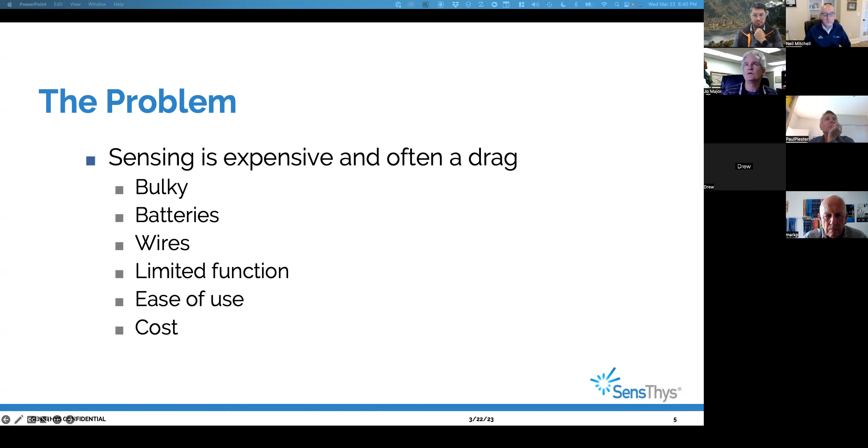We list some of the reasons there that this is hard. It's also quite expensive - quite often we're replacing sensors that cost $1,000 or $2,500, and a reader and some tags that are frankly disposable can give the same equivalent information, and it's very transformative there.

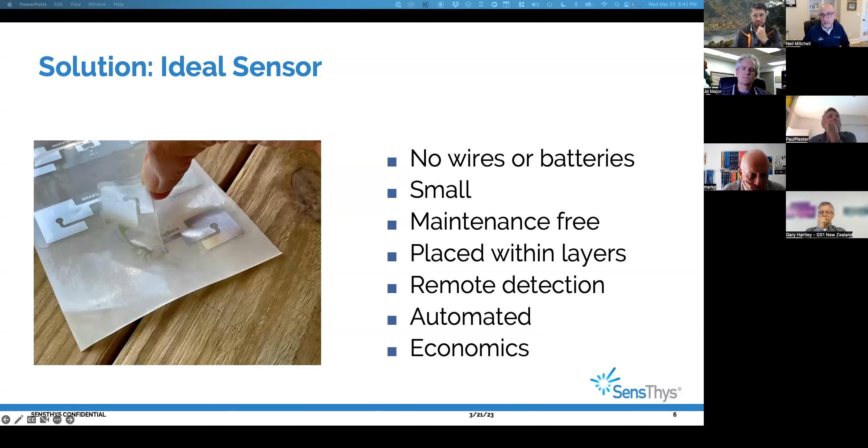So, if you kind of paint the picture of an ideal sensor, what would it look like? A bunch of us here are familiar with RFID, maybe some are not. If you say, what's an ideal sensor that will go into some of these solutions? You'd probably list things like: I don't want wires going everywhere, I don't want batteries because they run out and need to be replaced and they're bulky. I want something very small, ideally so small it's ultra thin and I can place it within layers of different materials. I don't want to have to maintain it. I want to be able to detect it remotely, wirelessly. I want it to be automated, and I want it to be really economic, relatively inexpensive. We want these sensors to be the opposite of the $1,000 statement Joe just made—I want it to be a few bucks perhaps. And that's where we are with these types of sensors. You can see an example of one in the image there.

We're going to talk about supply chain, and you may think, why in the world are they pitching us sensors—why do we have to think about the supply chain? The reason will be evident when we walk you through it: the supply chain is really good at making low-cost RFID tags, but it isn't so good if you say the medium I'm in has a high dielectric constant with a loss tangent of X, and that changes to a different dielectric constant and loss tangent during the process, and I need to operate in that environment. Those kinds of statements are outside of what the industry normally does. When we walk you through this, we'll give you a feeling for how those problems come up and how we help you solve them.

So over to you, Neil.

Let's talk through what one of these sensors looks like and what's actually constructed within them. The first thing is there's a semiconductor component—the IC or the die, many different names for it—this little chip sitting in the middle of this RFID structure. It's part of the intelligence that makes up this end solution. There's a lot of smarts in the chip, but also in how this thing is designed and put together. There are multiple antennas attached to this in reality, but as you can see, the chip is really, really small. We'll hold one up here so you can see it. Obviously you won't be able to see the chip in it because it's way too small, but this is basically one of the sensors we're talking about.

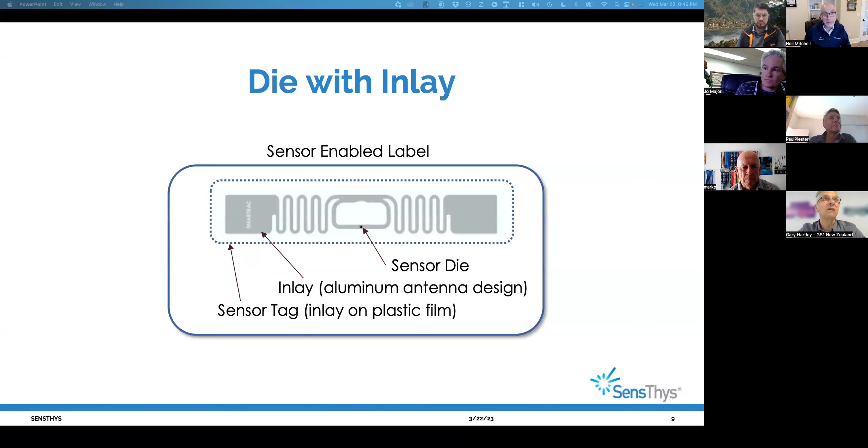Then the next step after the aluminum antenna is to put it into a label, or at least into a protective structure—something you'd actually apply into your system. Often we're talking about something where you want printing on it, or you may want a barcode on it.

You'd probably want it a few layers. Do you want it white? What kind of structure do you want it on? Rolled or sheets? Which way do you want it to unwind? There's a whole complicated array of questions that come with how these things are provided. We can certainly help you with that. It's not rocket science, but there's a hell of a lot of details, and we can help you through that.

If you apply that onto a metal, say in a vehicle, maybe now we want to get moisture wicked to it or transported to it, so this RFID sensor can do its thing. So now you're talking about attaching a wick tail in order to draw water towards it. That's something we've been involved in, defining what that wick looks like.

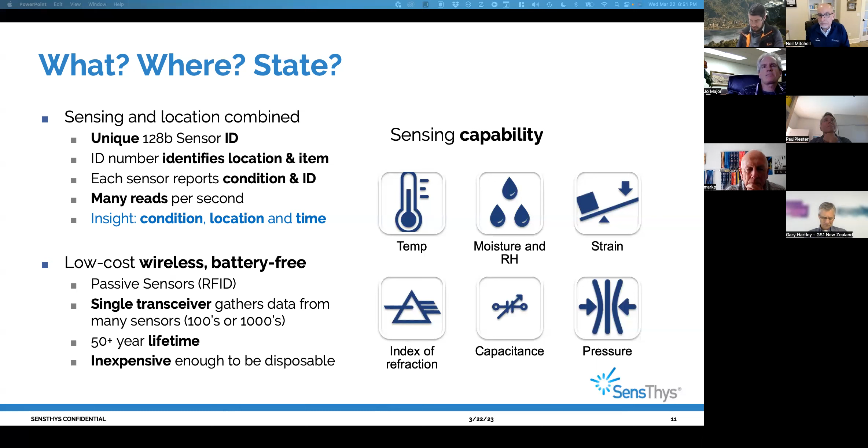Normally in the sensing world, you have one wire going to one sensor, and you've got to plug it in, and you can only do 4 sensors, then you run out of ports and need to buy another piece of kit for $50,000, and repeat. We don't need to do that. Basically, you can put as many of these things in and read 100 or 1,000 of them, 10,000 of them.

It's important that we understand with our customers, or help our customers understand, how to think about this capability. We've worked with Asygn in particular very closely to help customers understand where things are and what is required to go from where that is into a full application.

Axzon has been around for much longer. They do have products in production, which means we can get you tags and they're reasonably priced and they work - temperature, moisture, and index sensors. If the inlay of one of those doesn't work in the application, which happens fairly often, then basically we have to go back to stage number 4, make a proto label, then make samples and get into production.

Asygn is a younger company, very, very capable, a lot of fun to play with, much broader. The physics of the device gives them more opportunities to sense different things. You can read that list. Temperature tags are in pretty good shape - you can buy them, they're entering prime time.

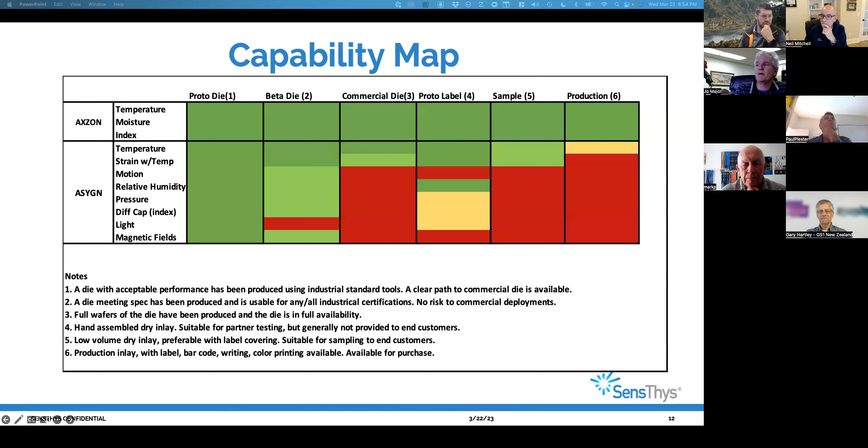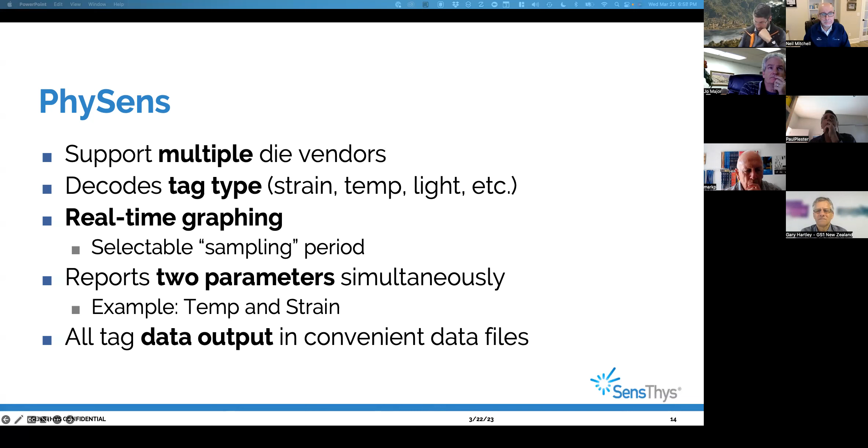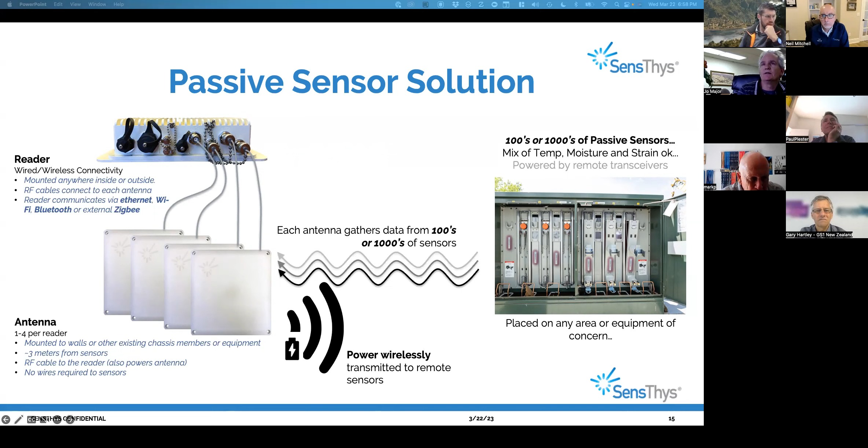I think next. So good, yeah, so what we're going to do now, these are literally just 1 minute videos each, and we've got a couple of them. This one here is PhySens in operation, and we're actually going to run it and show you what happens as we measure water and heat.

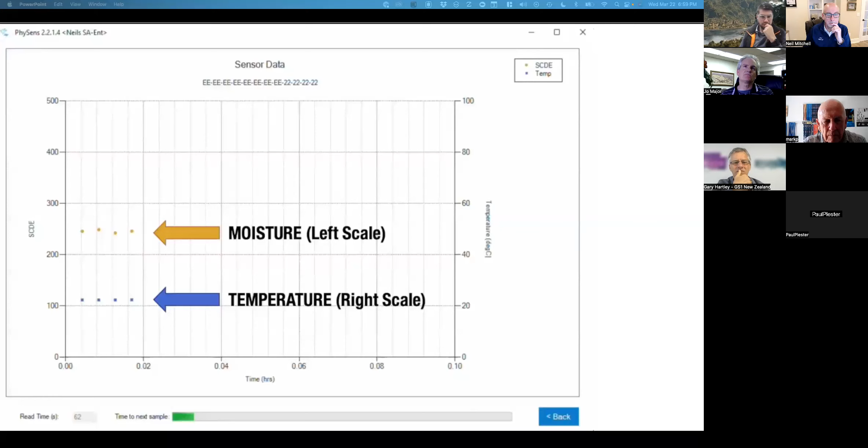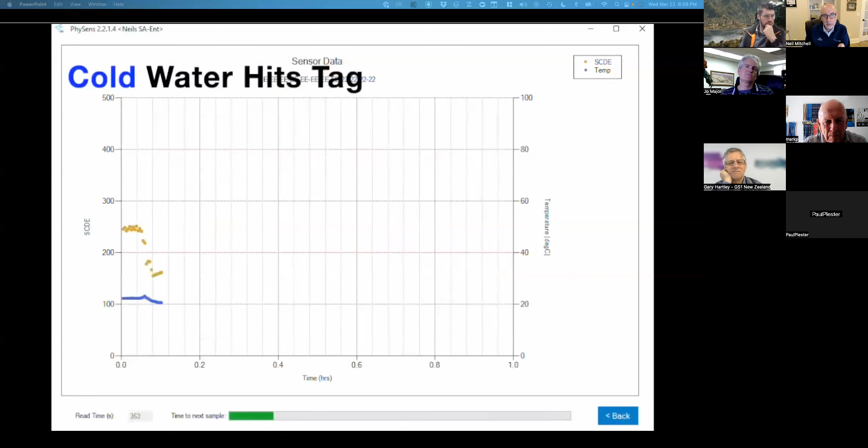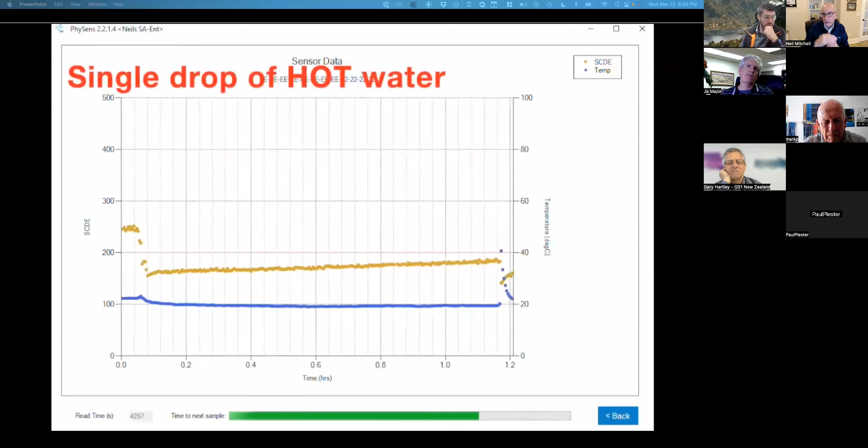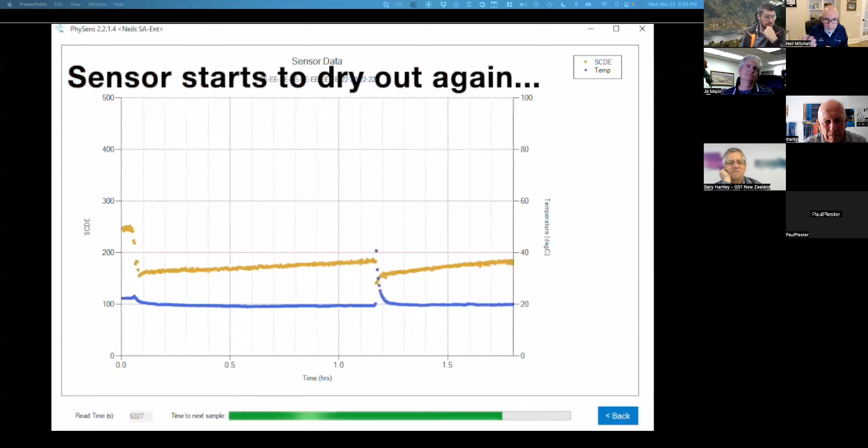At the top we have in orange the moisture reading, and then blue is temperature. So every 15 seconds in this case we're reading, and then something's happened there, that there's been moisture detected. This tool basically resizes the chart for you. So now we're starting to see a very slow increase in that moisture level, and then all of a sudden it's going down again. And something's happened to the temperature. It's gone, you see the blue line there, gone from 20 centigrade to 40 odd centigrade.

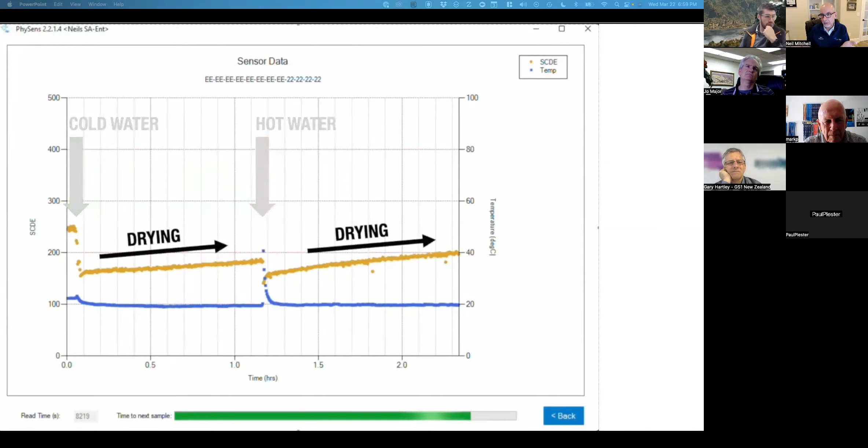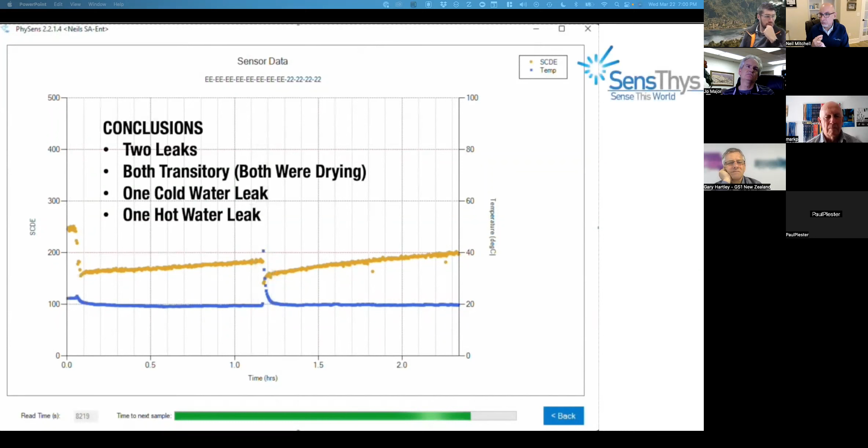So you can see there what's happened. One drop of water, cold water, and one drop of hot water landed on these things. They were drying out. You can see the temperature of that water, and you can see when it happened. So all of a sudden, you know immediately by looking at this data, there were 2 leaks. They were both transitory, one was a cold water drop, one was a hot water drop. You know that all just from that information already.

So this is another view of it. This is one we kind of captured earlier and annotated to make it a little bit easier to see. We'll give you access to this presentation material so you can see it afterwards. I won't go through the whole thing because it's basically what you just saw. But you can see here the dry level, the wet level, the difference here, and the big spike in temperature here. That's pretty much what you just saw.

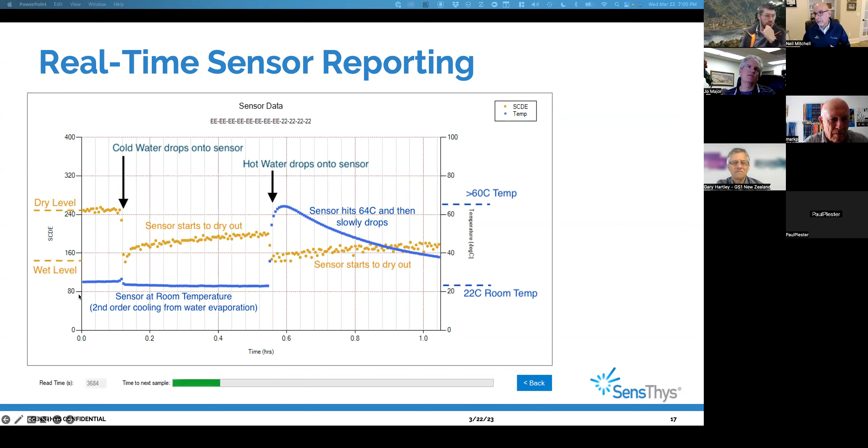On the right-hand side here, we have the temperature in centigrade, and on the left side, there's basically a special code value representative of the other thing you're measuring. One more we'll show here, which is the strain. So here I'm basically taking one of the strain tags, putting it on the business card, and bending the business card in 2 different dimensions and at 2 different extremes.

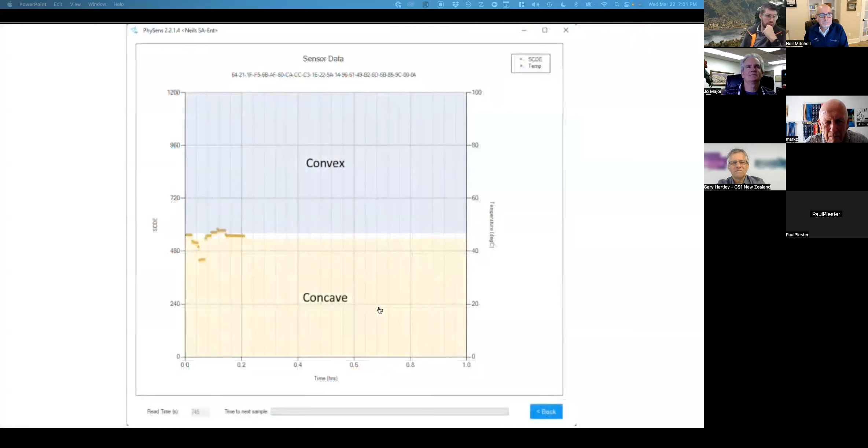One comment on that particular video, that was actually done with an uncalibrated early prototype. So what you'll see is also those things can be made more extreme, you'll see that a little bit better in future. But one comment about the strain tag, we were having a lot of fun with that strain tag. Of course, that strain tag, when you put it into its application, fails, and it has to be adapted to work in the real world.

Okay, we're going to show you, this will explain itself. I'll talk as it goes. Hit it, Neil.

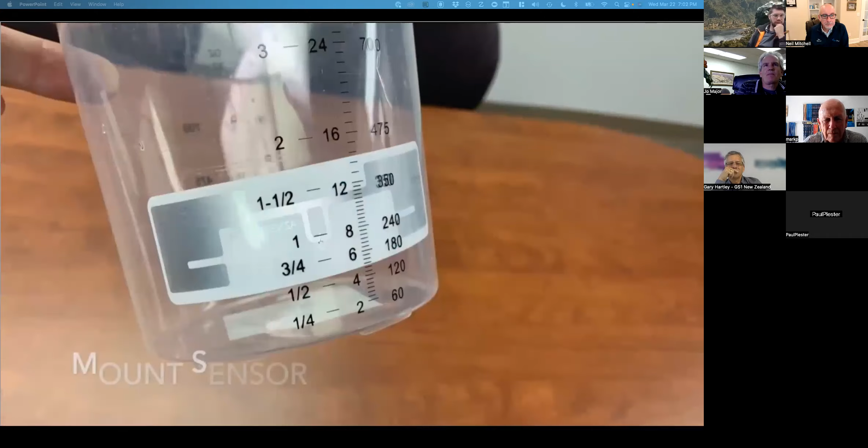And so there's a sensor in a simple plastic cup. The reader here, I don't know how far away it is. It's probably 3 meters away.

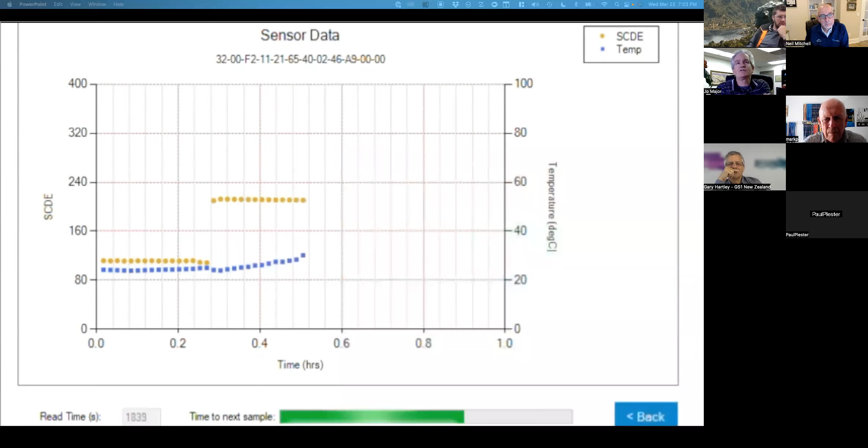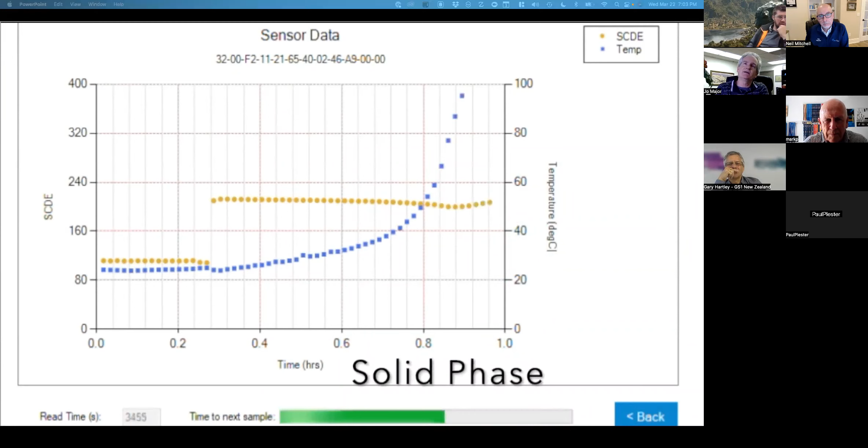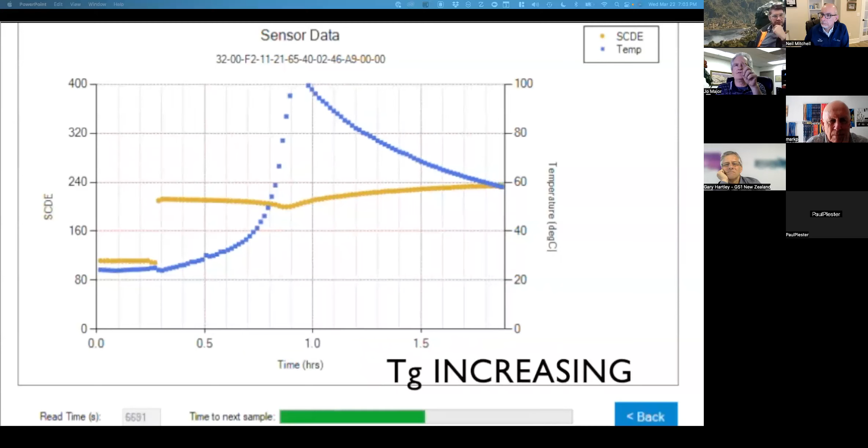There's the baseline. We're going to add epoxy and directly measure how exothermic it is, and directly measure when it flips from the liquid state of cure to the solid state of cure. As the time goes along, the point where it flips to solid becomes very clear. It's also clear, and we'll talk about it in a second, that the cure is proceeding as the orange line moves up.

The chemistry of epoxy was first really mapped with interdigitated capacitance sensors in the 60s and 70s, and this is in effect mimicking that. Instead of having wires and a lot of bizarre stuff, it does it at a very low cost point. It actually tracks the flipping of this from - if you've worked with epoxies, they're sort of like honey, real thick and viscous, then all of a sudden they kind of get hard. That's that part where it gets hard, that's flipping into the solid state phase of cure.

We also track the max temp and when the max temp occurs. If we're doing that for epoxies, just looking at raw chemistries, we can actually see differences between various epoxies, and we can detect incorrect epoxy mix ratios. Finally, as that orange trace goes up, you can estimate how far along it is in its cure process. That's a really neat thing to say to somebody: what's the temperature inside my mold and how cured am I?

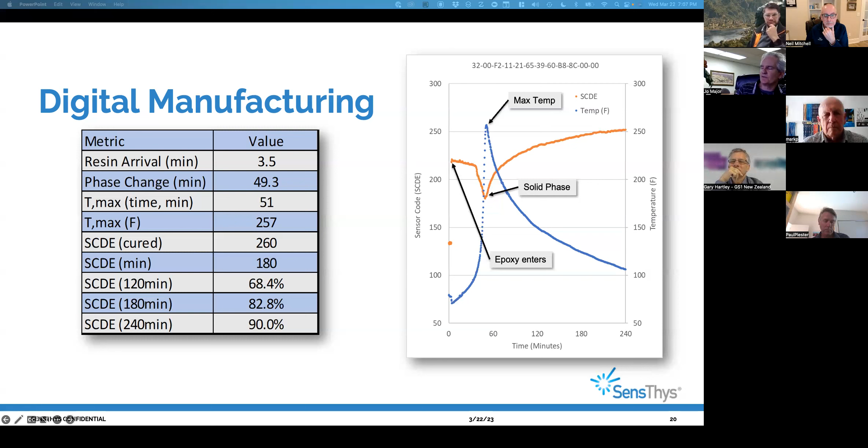Next, so we're going to whiz through some of these, but we just wanted to give you a little taste of some of the varied applications that we're seeing with some of these passive sensors.

Okay, so in an effort to go faster, machinery, you want to make sure it doesn't get too hot, and if it's getting too hot, you want to turn it off before it does any damage. So a lot of different applications for that. You can imagine these things can look at a lot of different tools in an area at the same time, so it's a pretty neat application.

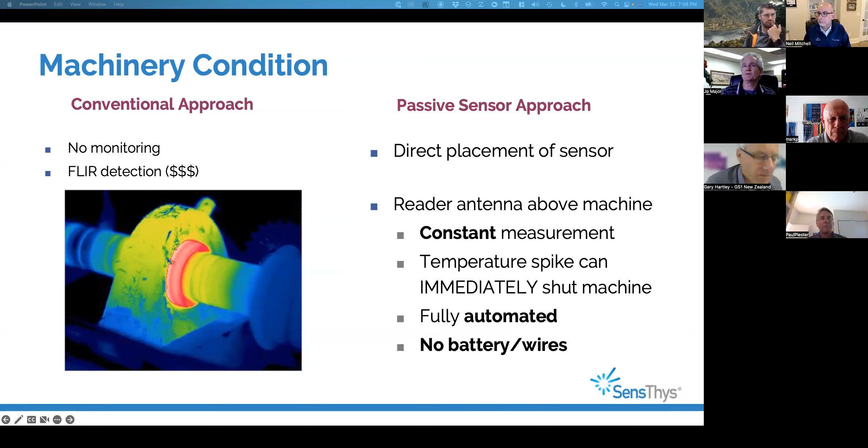Next, good use for ceramic tags. One we kind of touched on before, so I won't go through all the gory details, but automotive manufacturing, where it's a huge cost if a car goes out with a leak in it. If your name's Audi or Ford, it doesn't really matter. If you manage to anger a customer, they won't come back to you. So it's not just several thousands of dollars of repair, it's that reputation loss as well.

Anyway, we've been involved with some companies doing high pressure testing, water testing of the vehicle during manufacturing, on the production line. We've developed some iOS and Android software that does a before and after comparison. They test these tags being placed into the vehicle, some with wicks, some without. It's read before it goes through the spraying machines that spray the vehicles, comes out the other end, you retest it, and you get a red or a green light depending on if there's water there. Simple as that.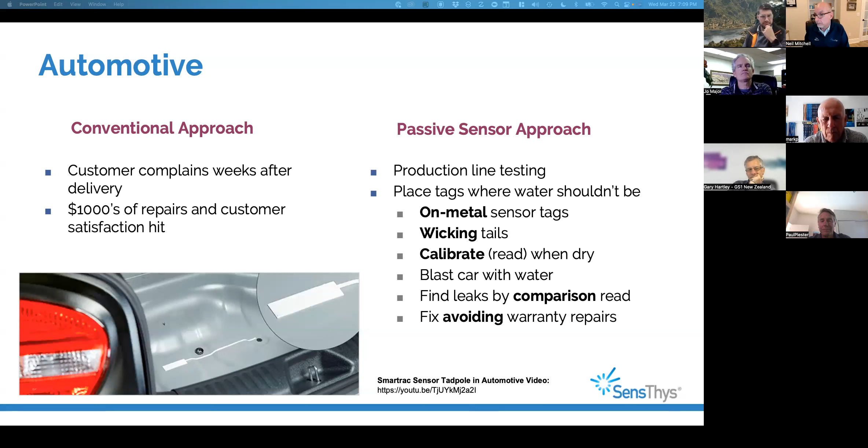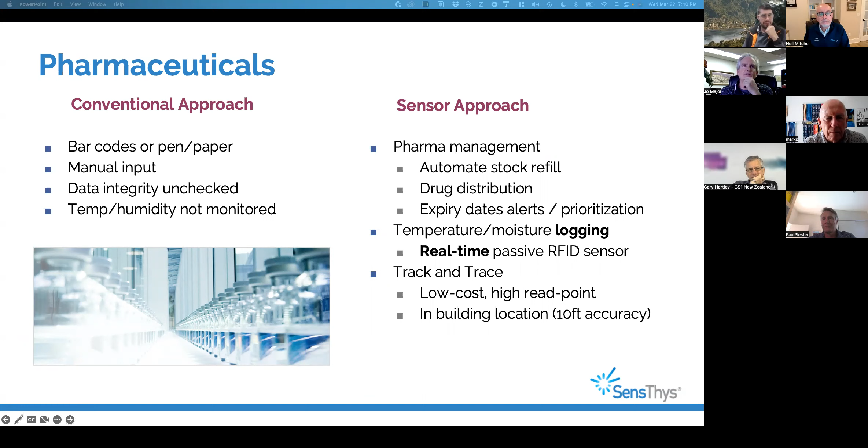Yeah, so in pharmaceuticals there's lots of applications. I think at this point it probably serves us well to open it up for questions because we're running a little bit late. Let's skip this one.

What material do you have? What are you trying to see? The environment can corrupt sensor data, and we can help minimize that corruption. We also have methods of finding it and getting it out, so that even fairly corrupt data can be made usable. It is non-trivial to optimize a reader for sensors. If you read an RFID tag, you declare victory. With a sensor tag, if it has too little power, if it has too much power, if it's too close to noise, all of those things give you crap. And it's sometimes fairly difficult to figure that out.

Neil showed an application for leak detection. That leak detection has a 29-page application note, and it covers all kinds of crazy topics to try and help people. We already preached about the die and the inlay, and anyway... I would just say we've done a lot of software that manages a lot of that, in addition to having to bring our own expertise to bear. And a lot of times the software we do is what helped the Kiwis get up and running with not too much support—they benefited a lot from us struggling through a lot of problems in that area.